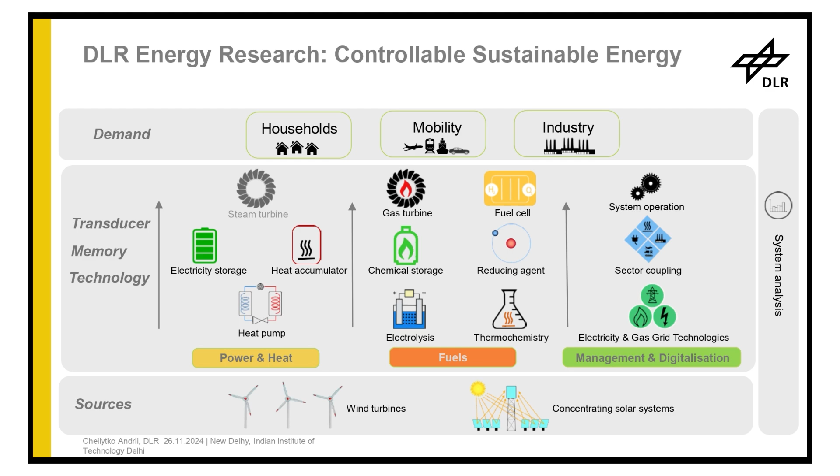We use different sources such as wind turbines, concentrated solar systems, and storage and technology. We can meet demand for heat energy, electric energy, including households, mobility, and industry in general. We provide power and heat. We can create fuels, solar hydrogen, and others now. We also work with management and digitalization.

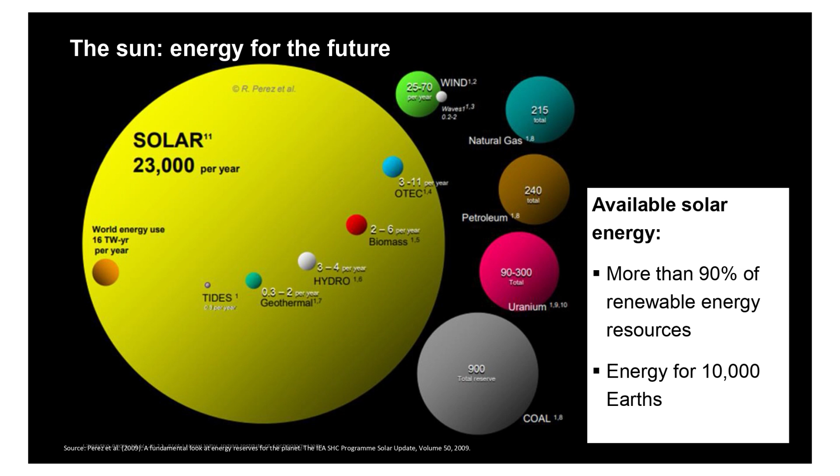Now about the Solar Institute. So, solar is the biggest potential source on our planet. Maybe on Mercury or Mars we can have others, but for our planet, it's not comparable. In the slide you can see its potential, what potential energy we can have. Question: why don't we use it? Or we use it, but not enough?

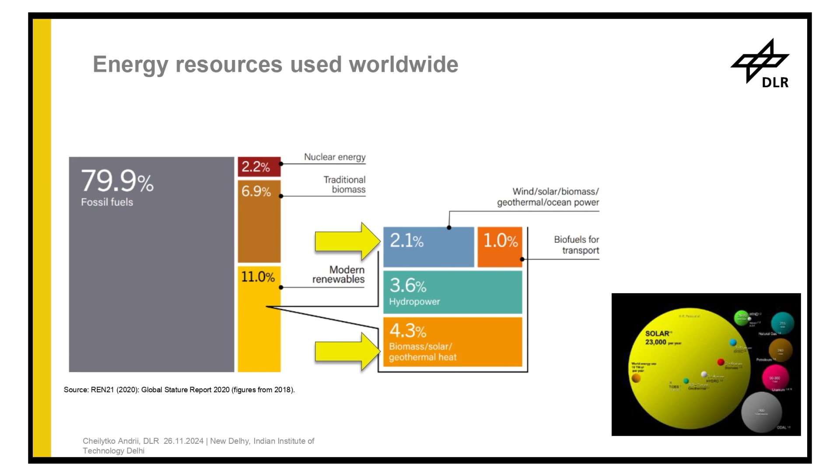If we compare with fossil fuels, including biomass, it's not comparable in general. But what energy sources were used worldwide in 2020? Almost 80% fossil fuels. It's a fact. A little bit of nuclear, 7% biomass, and 11% renewable energy. Question: with this biggest potential, why don't we use it?

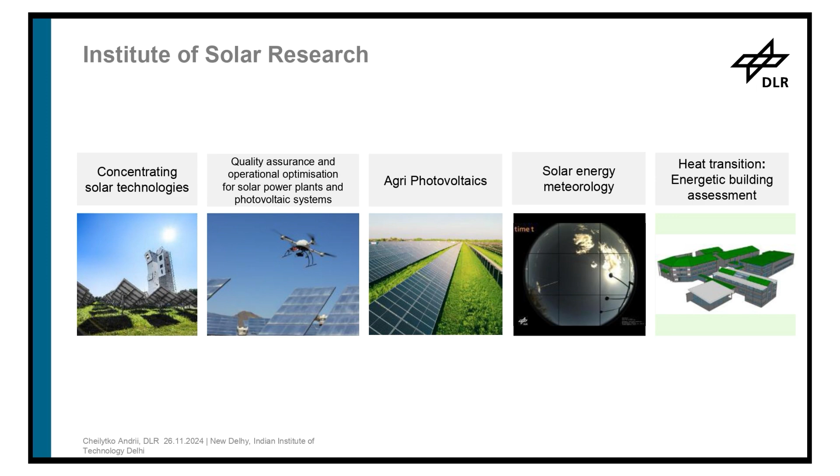What is the problem? High cost, not enough scientific research, or not enough energy efficiency? So, yeah. Our institute is about the future. We think about how we can improve current technology in every industry, in every household, and how we can use our solar energy for any technology.

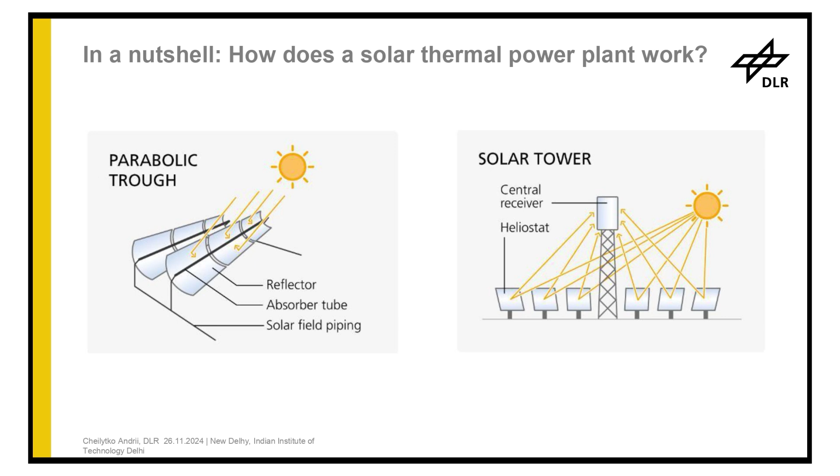Our institute has different departments: concentrating solar technologies, quality assurance and operation optimization for solar power plants, photovoltaic systems, agri-photovoltaics, solar energy meteorology, and heat transition and energetic building assessment. What is concentration? Today we must speak about concentration technology and how we can use solar concentration. It's for the most common technology.

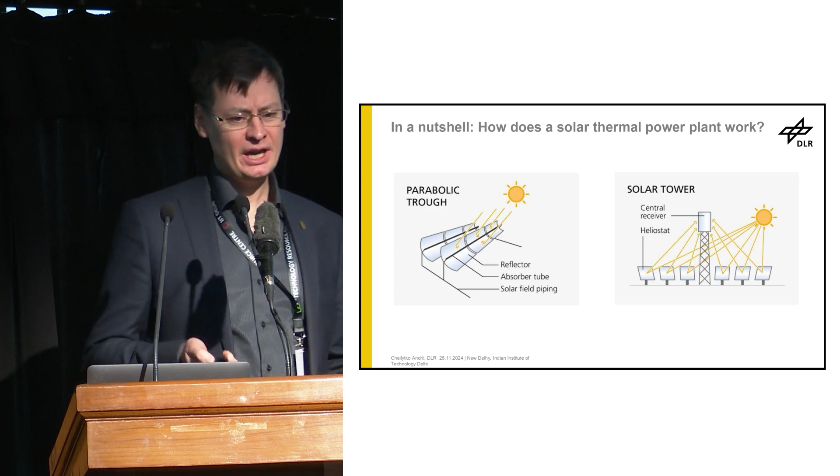We speak about two types: parabolic trough and solar tower. The general principle of work you can see in the slide. We have reflector mirrors that collect solar rays, bundle them, and reflect them to the solar receiver. There are different kinds of solar receivers; we can design many kinds, but the main task of the solar receiver is to transfer radiation to heat energy, and then we can use this heat energy for other systems, with or without catalytic reaction.

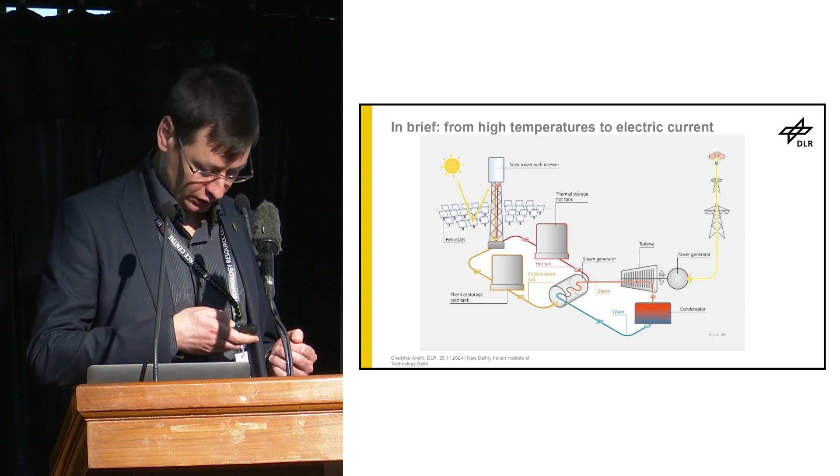A little bit more about how it works for the solar tower. Why solar tower? It's what I'm working on. So we have a lot of heliostats, a field of heliostats that collect and bundle solar rays and reflect them to the top of the solar tower. In the solar tower we have the solar receiver, which transfers radiation energy to heat energy, and usually we use thermal storage, a hot tank and a cold tank. This scheme is for molten salt.

We use molten salt, and through a heat exchanger we can transfer our energy to steam, to water, and this part is the standard part of a thermal power plant. So we use steam for the turbine, 2-3 turbine stages, high pressure turbine, low pressure turbine. For solar towers we usually use a low pressure turbine, and with the turbine and an electric generator we can produce electric energy.

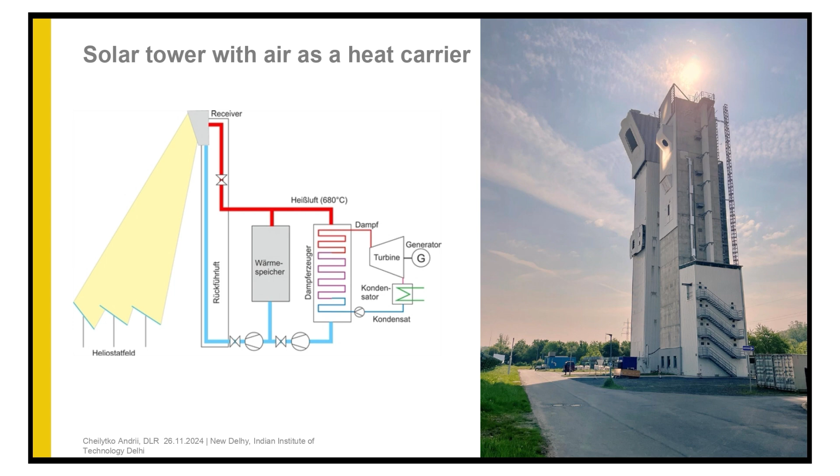Another way, we can use air, not molten salt. Why air? Molten salt we can use only up to a maximum of 545, okay, now it's 575 degrees Celsius. With air we can heat up to 1000 degrees, and we do 900. So we use a technology called the open volumetric receiver: we heat up air, have storage for air, and use the hot air in a heat exchanger to generate steam, or we can use it from this scheme for cement production or other technology.

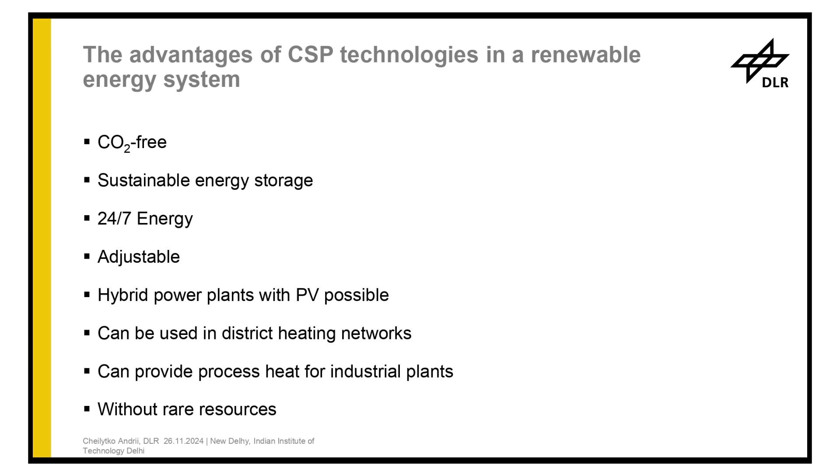It's an open volumetric receiver. We'll speak about the other tower in another slide. So, what advantages does this technology have? CO2 free, of course. Sustainable energy, of course. 24/7, yes. Theoretically, potentially we can get it with big thermal energy storage. Theoretically yes, practically no. It's low efficiency.

Adjustable, yes. Hybrid power plants with PV are possible. So for producing electric energy, or for complicated processes like the cement technology we spoke about, it's also possible to create a hybrid power plant. So we use concentrators, our parabolic troughs or solar tower, with PV panels. And according to the latest research, the cost is near as low as with PV panels alone. So it has very good economic profitability.

But we have electricity and heat, not only electricity. So it's also possible to use it for district heat networks, it can provide process heat for industrial plants, and without rare resources.

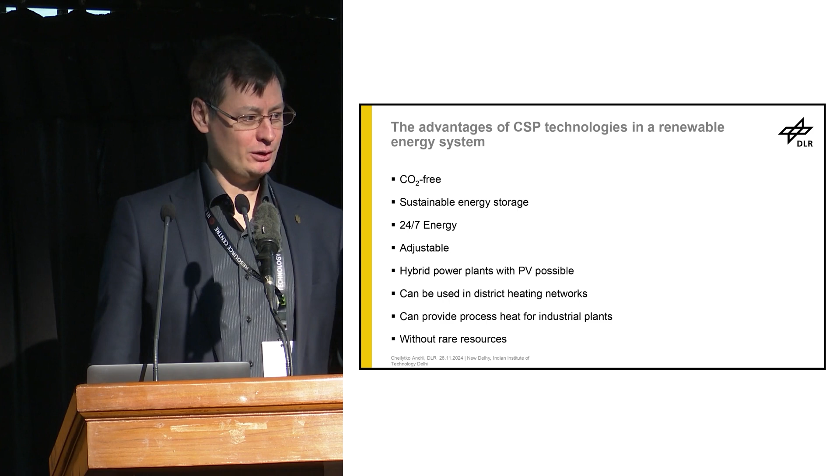And we use it in Germany. Come on, we don't have sun in Germany. It's not a solar country. Okay, Stuttgart may be more sunny. We are in NRW, North Rhine-Westphalia region, near Köln. It's not about solar in general. The weather is more like in the Netherlands.

So, milestones of our institute. We started in 2011 with some parabolic troughs and some facilities in Köln. The Institute of Solar Research was founded, not about aeronautics, but about solar energy and sustainable energy. In this year, we also took over the Jülich Solar Tower. It was a real plant for electricity production, and yeah, we bought it. In 2017, we built Synlight, the biggest artificial sun. It's a powerful laboratory for solar research.

In 2020, as a spin-off from us, the Institute of Future Fuels was established. It's solar hydrogen, solar kerosene, solar gasoline and others. And in 2020, we built a second solar tower for research. It's a multifocus solar tower for research on particle receivers, cement technology, and other technologies.

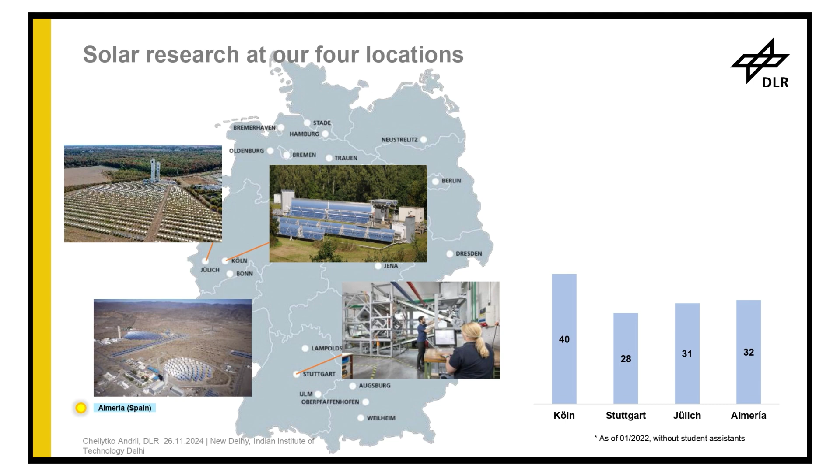Our geolocation. The main solar tower we have in Jülich, North Rhine-Westphalia region. Parabolic troughs and facilities we have in Köln. We have a solar power plant in Spain, Almeria. And in Stuttgart, it's a research center for fluid dynamics and material technology.

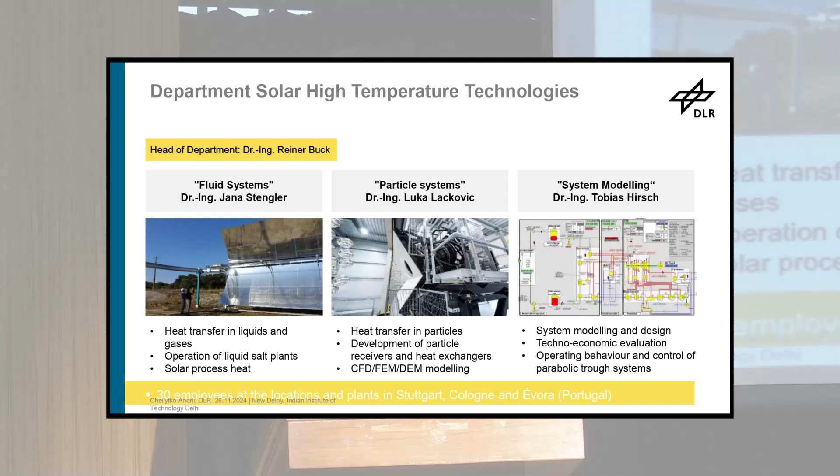Okay, what we do. Department for Development and Optimization of Solar Thermal Power Plants. It includes solar high temperature technologies, solar power plant technologies, qualification, and chairs in Aachen. Department of Solar High Temperature Technology: fluid systems, particle systems, and modeling of systems.

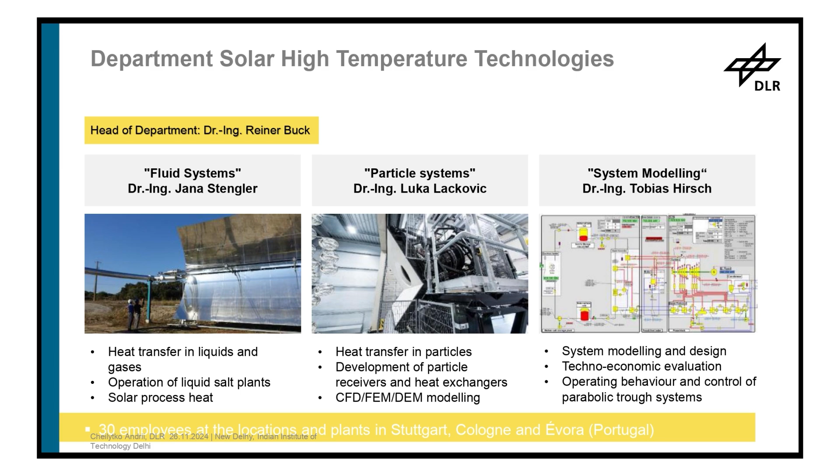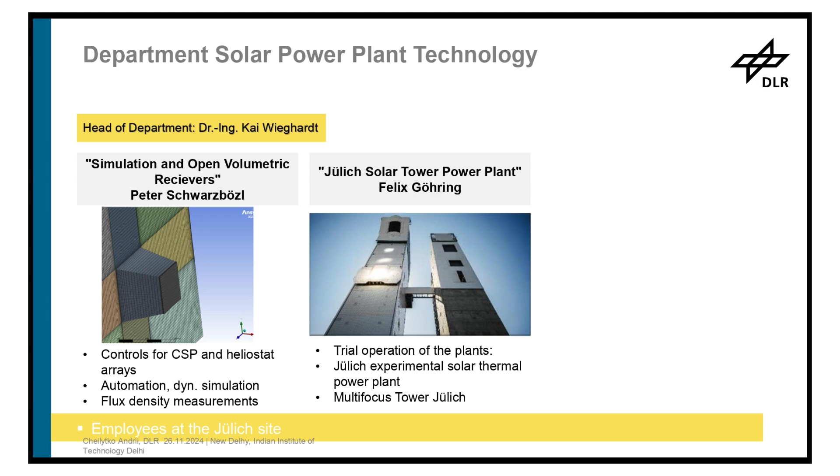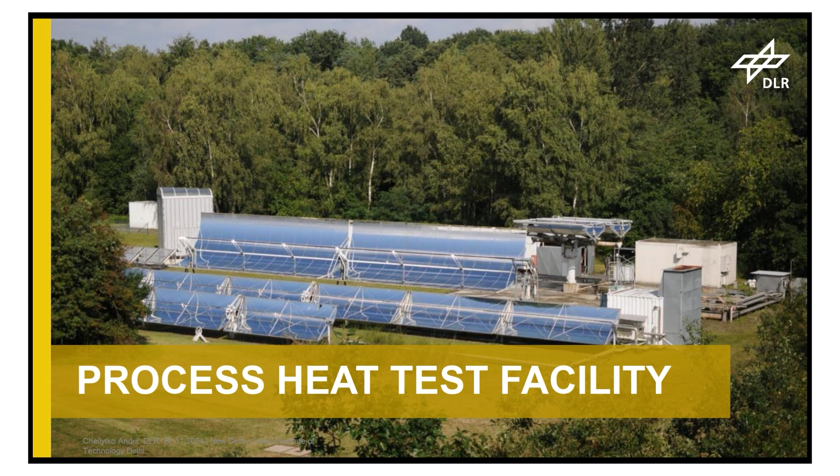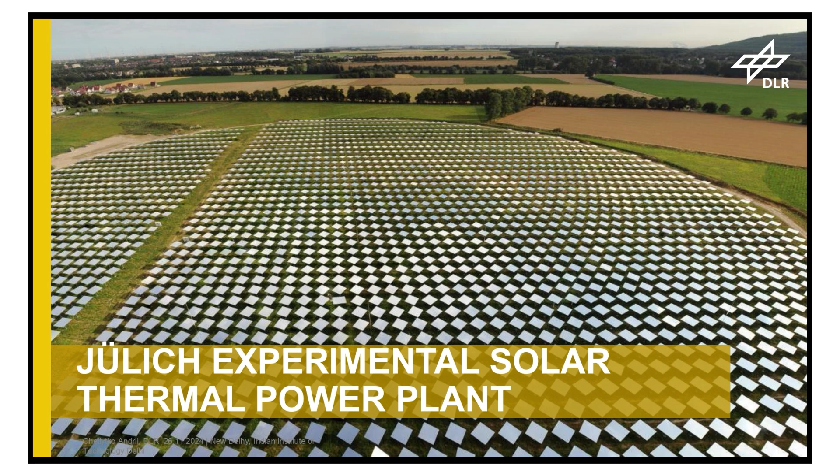Our facilities. Plataforma Solar de Almería, Spain, operator CIEMAT. Process heat test facilities, Köln, Germany. Évora molten salt platform. Jülich experimental solar tower plant, 2000 mirrors.

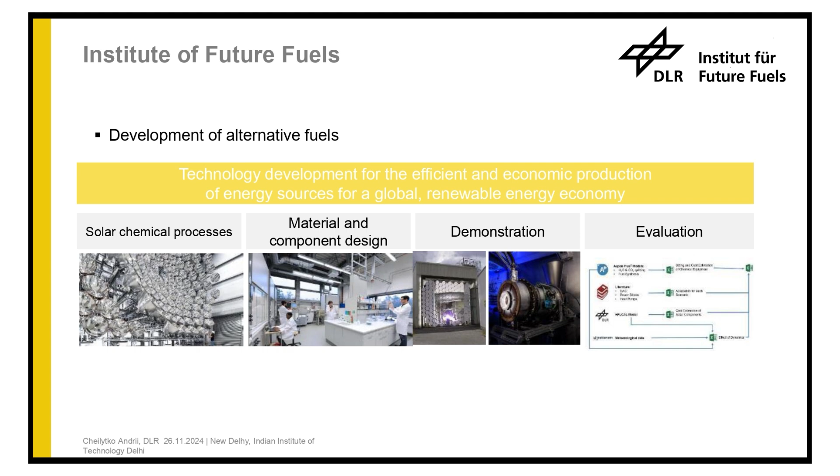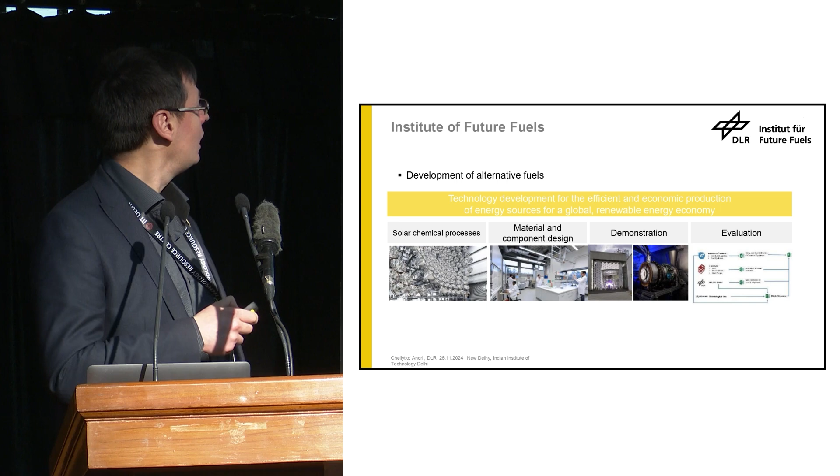And a little bit about the Institute of Future Fuels, because they will speak about it in the third part. The Institute of Future Fuels also researches the calcination process with direct solar radiation. So that's about our institute and our technology.

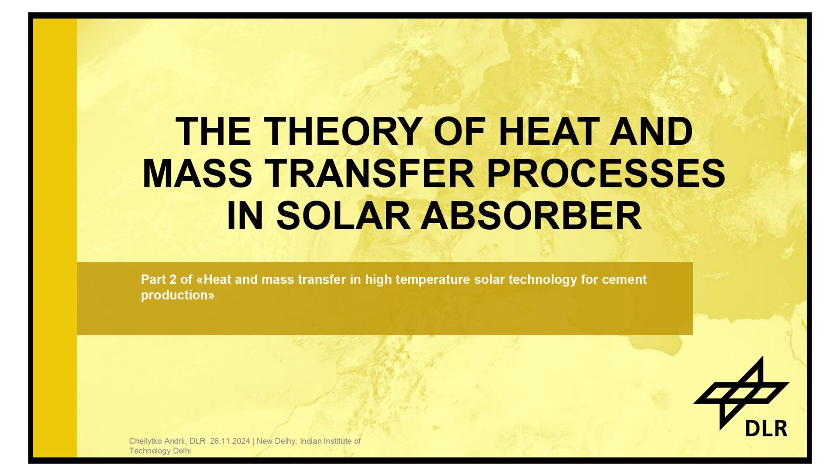I know it's lunch time, but I have a little bit of time, so I'll try to spend it on something more scientific. The second part of my talk is about heat and mass transfer, for student researchers interested in absorber technology, porous technology. My background is heat and mass transfer in porous media in general, and for 3 years I have focused on solar absorbers.

So we have... one moment, please. Good.

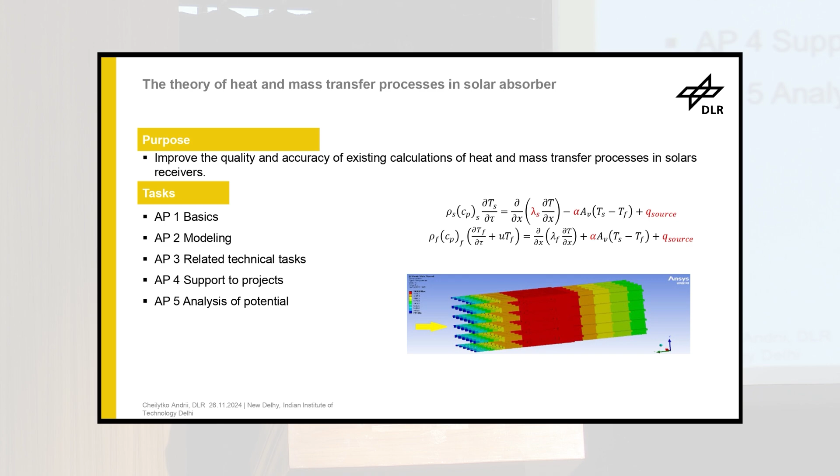So, theory of heat mass transfer process in solar absorbers. First of all, I understand you have good background in chemistry, civil engineering, and others, but I hope you know a little bit about heat mass transfer. At least we know the kinds of heat transfer: we can transfer energy due to radiation, convective and conductive, and of course diffusion, which is mass transfer.

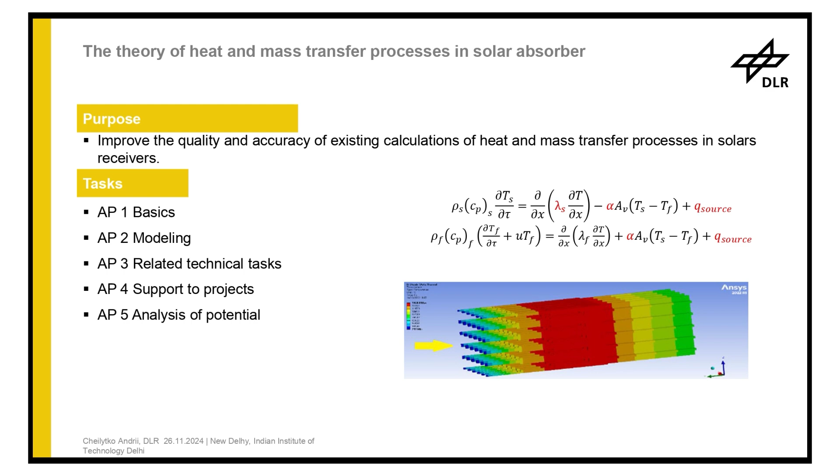What's the question we have? First of all, for porous structures, we have a lot of methodology, but the common method is numerical. What's the problem with numerical? We can calculate almost everything with numerical methods. But can we optimize a structure with numerical? Yes, with one material and 1,000 operations we have 1,000 results. We can optimize some porous structure if we want a specific structural result.

Question: can we do it the analytical way? With an analytical mathematical approach, it's very easy to do, but right now, no, we haven't - we don't have a good enough quality analytical approach. And it's my task to create this approach or improve the currently existing approach for heat mass transfer.

What's the problem? We have some methods. The most common, easiest method uses an effective coefficient. In the standard equation, we use S for solid and F for fluid index. So we use a standard Fourier equation to calculate heat transfer process with sources or without sources.

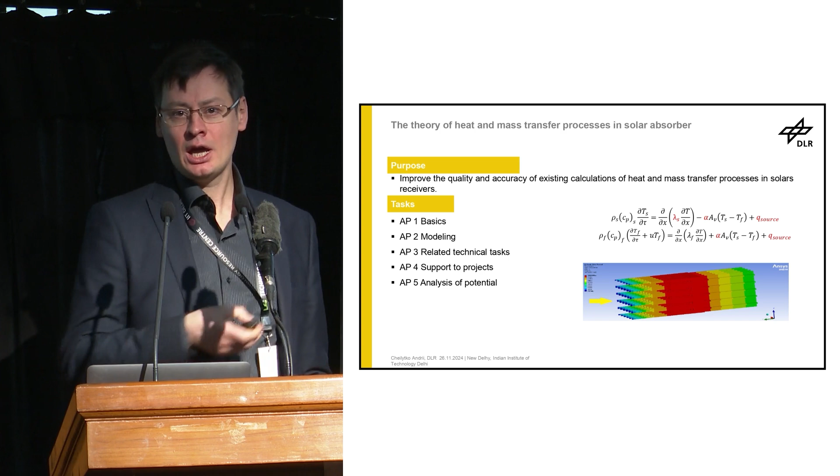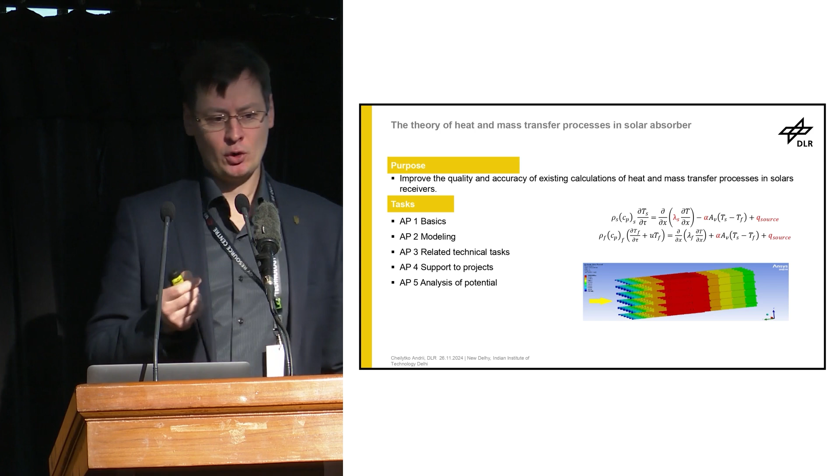Second question: can we use alpha via Nusselt? Of course we can use the Nusselt criterion for calculating alpha. What's the equation for calculating Nusselt? There's a typical equation, I will speak about it and show it. But the typical equation is also not good enough - we only have 30% accuracy in calculating alpha. That's the best I can find for structures we know. For unknown structures, we have more than 100% error - it's not a research-grade accuracy.

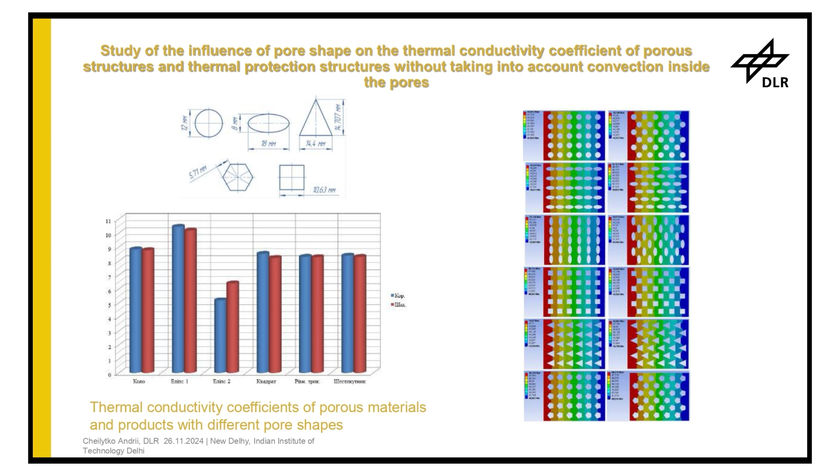So we were thinking about how different pore shapes influence thermal conductivity. First, without convectivity, just the conductivity coefficient - we can see that the shape of the pore has an influence. We did a very simple experiment for students with borosilicate glass; knowing the porosity, we can measure thermal conductivity easily and compare with different fluids.

We can compare with the most popular models - Eucken, Schutz, Torkar - and Odelevsky from Heat Atlas. I'm not sure, do you use Heat Atlas in India? It's like the most popular engineering book for calculating everything in heat mass transfer in Germany.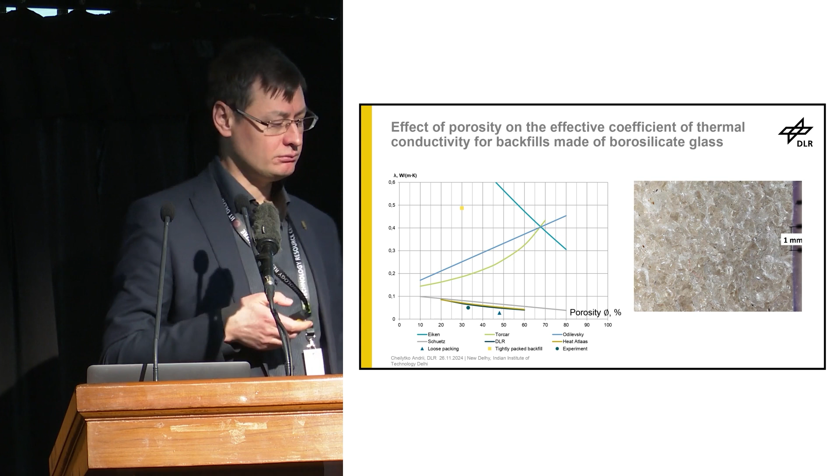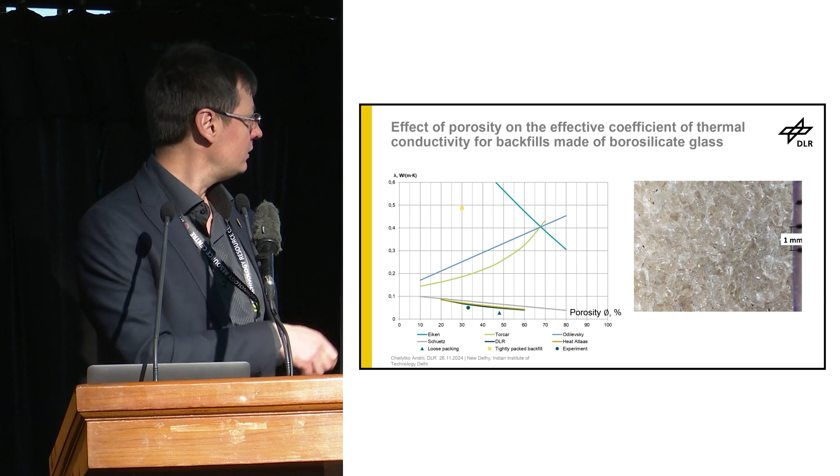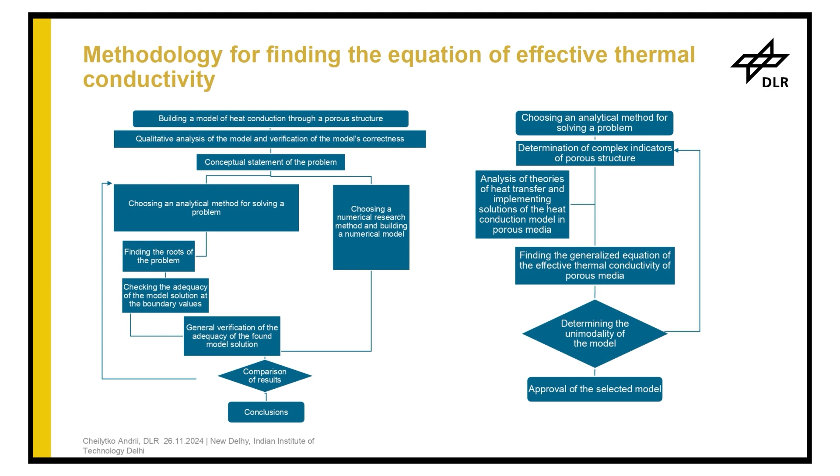For standard tightly packed, backfill, loose packed structures, we have our experimental points, and you can see other equations here. We have two approaches - one is our DLR approach, shown on the next slide, and it's very close to Heat Atlas. We can calculate it with only one efficiency coefficient, and it's for chaotic structures which I think will be used in your receiver.

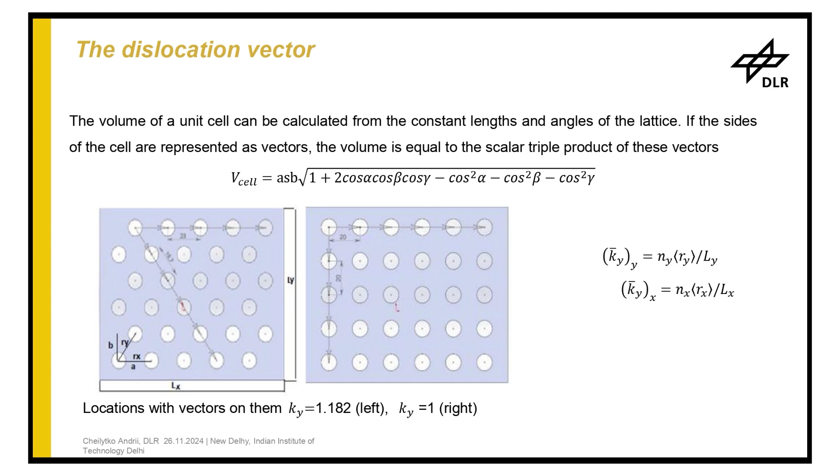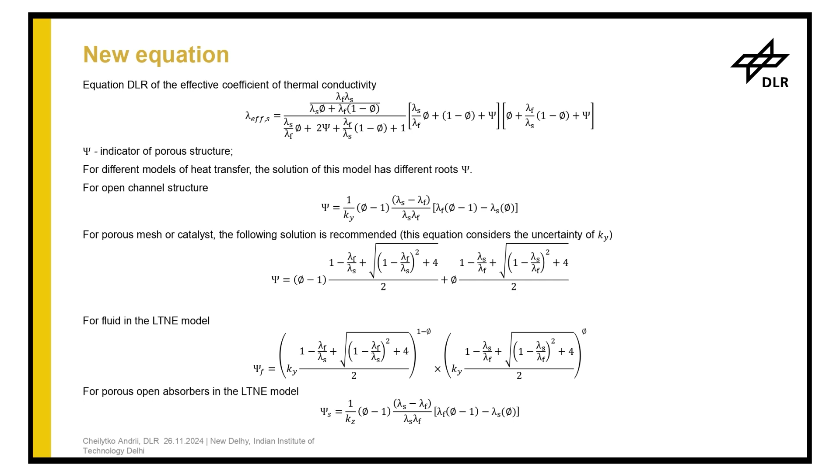So I won't spend your lunchtime on methodology and a very deep approach. We included some coefficients, like a dislocation vector, that include geometry characteristics of our structure. After including this coefficient, we can get an analytical solution for different structures, whether chaotic structures or foam, for the LTNE model.

This model, included for catalysts also, has less than 10% accuracy. It's better - for our task, good enough. For other applications I'm not sure. But for solar research, because the biggest energy transfer is due to convective transfer as a fluid, 10% accuracy for conductive transfer is good enough for us.

In this slide, you can see a comparison of different models for calculating the effective thermal conductivity coefficient. This is part of an absorber type HiTRec, part of an absorber type StepRec - 3D model, 3D printed. This is the absorber, made by 3D printing, this is silicon carbide. So theoretically, we have two standard curves, and between these curves is our real solution.

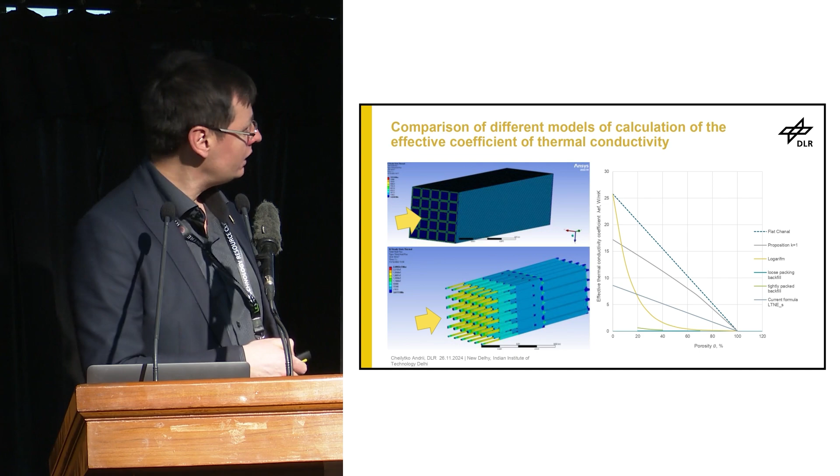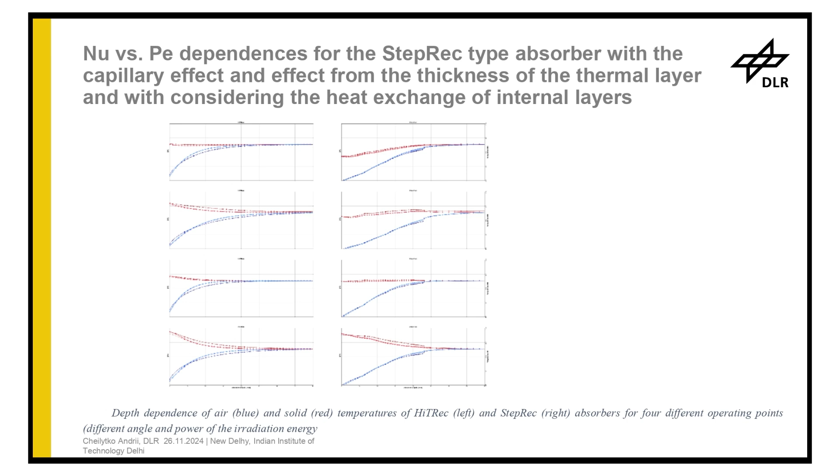So you can see that with our proposed model, it's theoretically good. And practically, we included this module as a homogeneous approach for open foam and calculated our heat transfer. I can see very good accuracy.

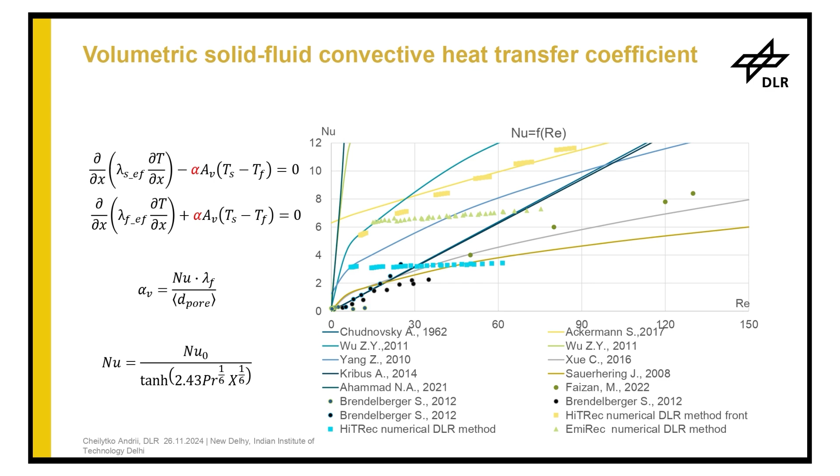But it's about, so we solved only one problem like 2 years ago. Second problem is about convective transfer, heat transfer. And you can see in this slide, standard graphic, Nusselt from Reynolds.

And you can see different theoretical functions. This is numerical solution, and around it, experiment. What's the problem with this? Coefficient, Nusselt coefficient, we can calculate, and due to Nusselt coefficient, we can calculate alpha.

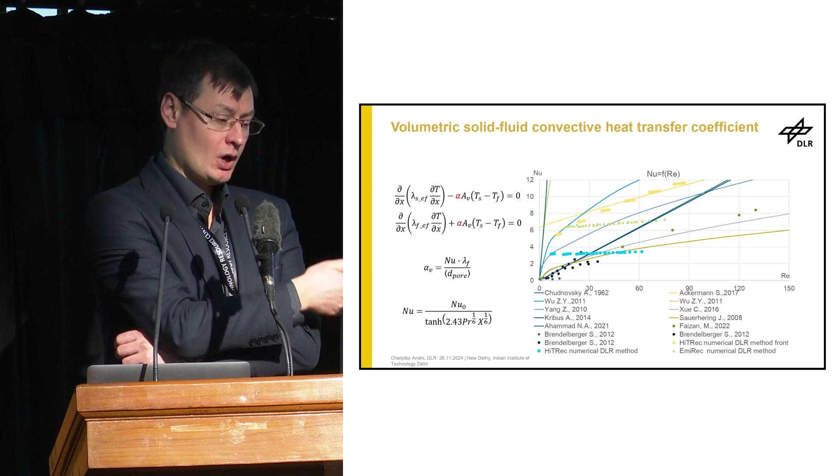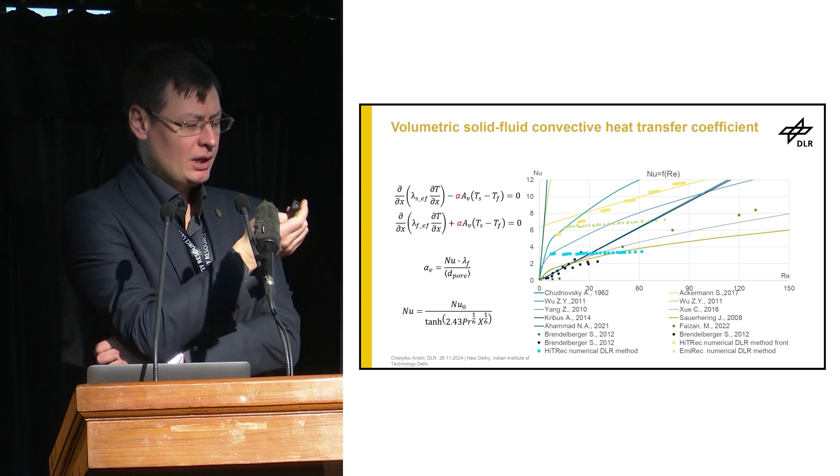Yeah, of course. But Nusselt coefficient, we can calculate only for some simple structure of absorber. Or for chaotic structure, we can use Darcy equation. But it's also not a better result.

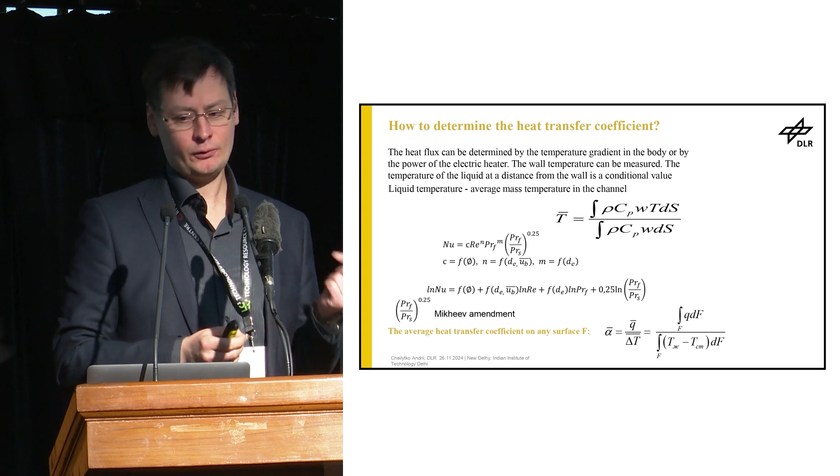So what's the problem with doing some experiment, measuring it, saying okay, it's working, we know this? The problem is that if you change a little bit other parameters of structure, or fluid, or angle of solar radiation, your model will not be working. So you can't just do an experiment and say, okay, I'll use this coefficient for other models. It's not working, unfortunately.

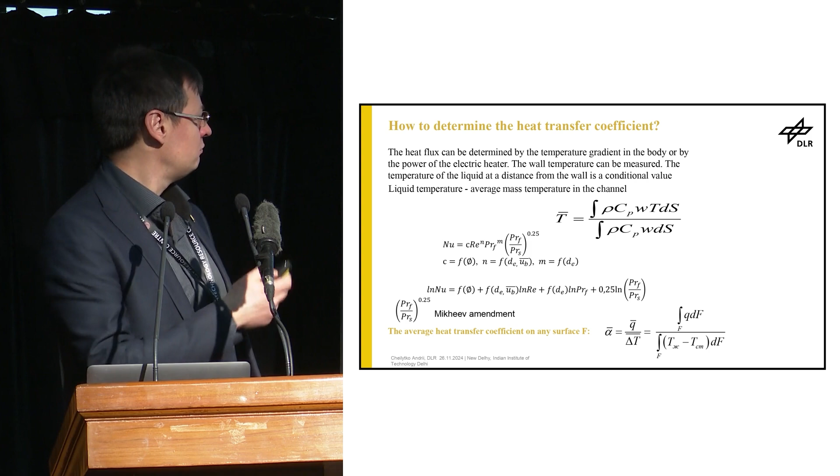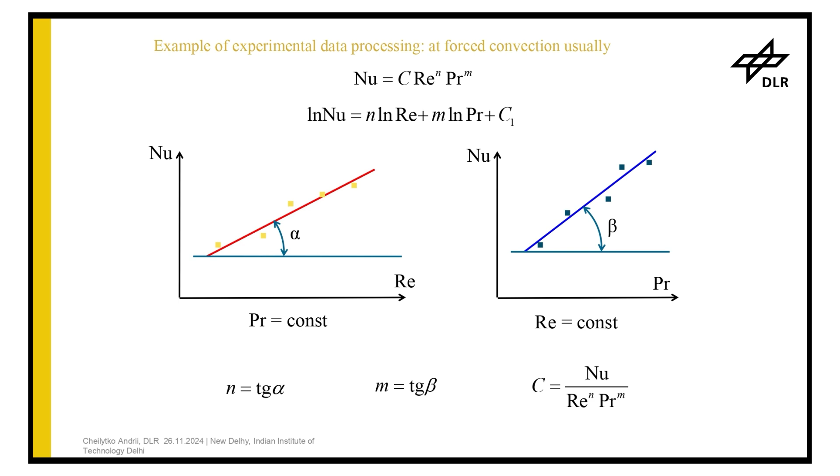The standard way is included in the standard book of heat mass transfer theory. We can calculate the coefficients C, N, and M if we know Reynolds and Prandtl coefficient. We build some graph, we have experiment points and build this line, and after this we know the angle and can calculate other coefficients. It's the standard way to understand the experimental Nusselt criteria.

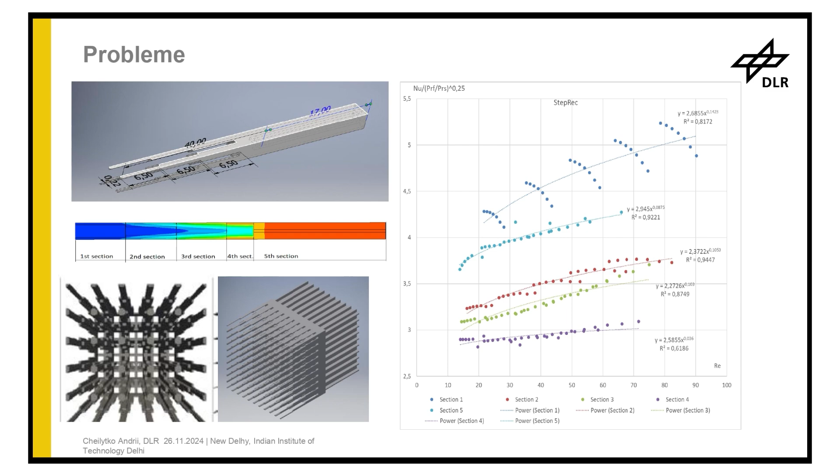But if we have this one channel for a new absorber for solar radiation with 3D printing technology, this is one channel, like this schematic. We have 5 sections. Each section has different geometry parameters, and each section has its own solution for the standard Nusselt approach.

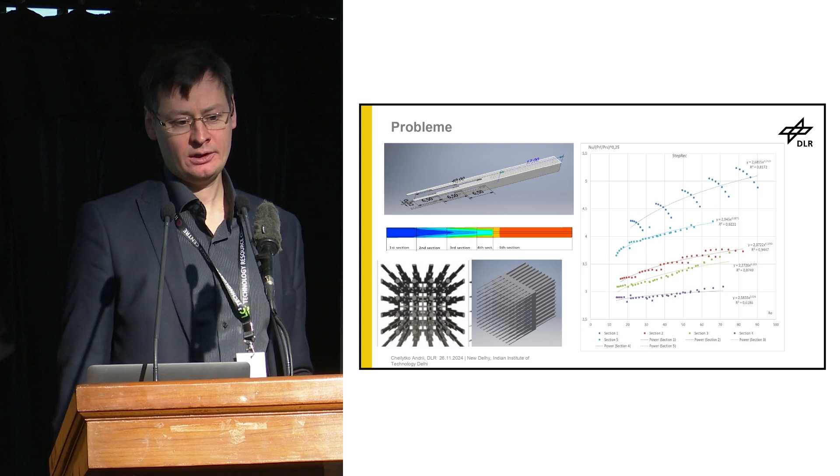If we use the standard approach, and for the first section in general, we can see that it's in general impossible to create one curve to understand our coefficient. This is our fluid dynamics model, and it looks like this absorber in the full model.

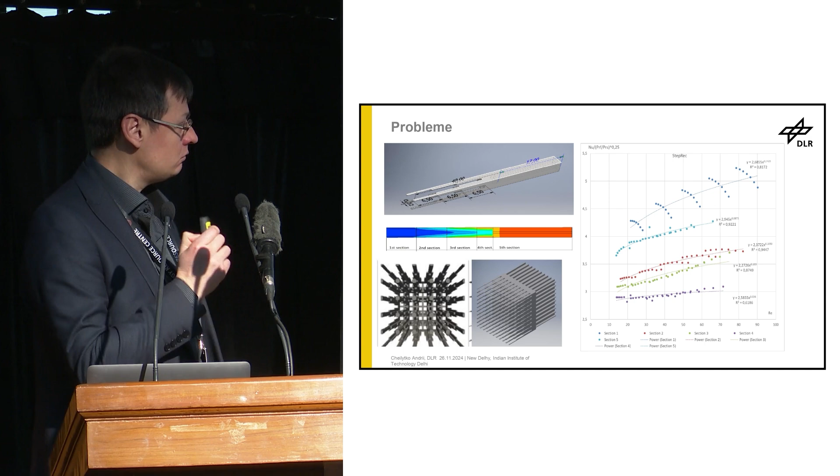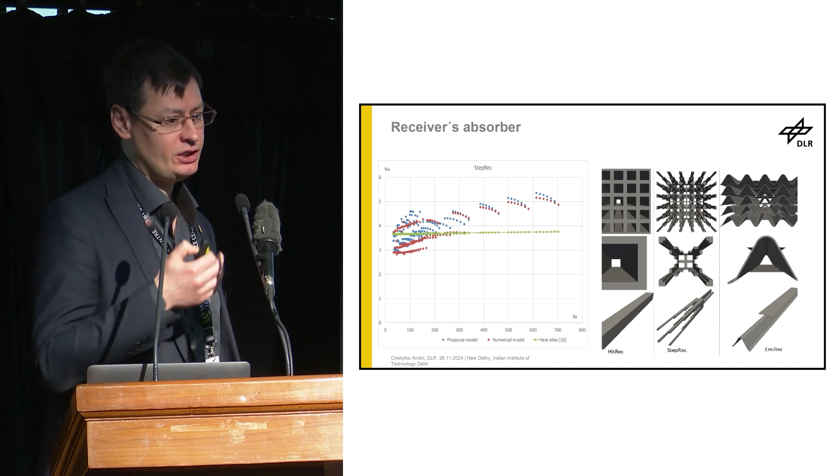So we thought about different ways to make this possible, and like half a year ago we published an article, and we can create a universal model for different approaches. It's the standard, most common, most popular solar absorbers for open volumetric receivers for heating air: HiTRec, StepRec, and EmiRec. It's one channel of this absorber.

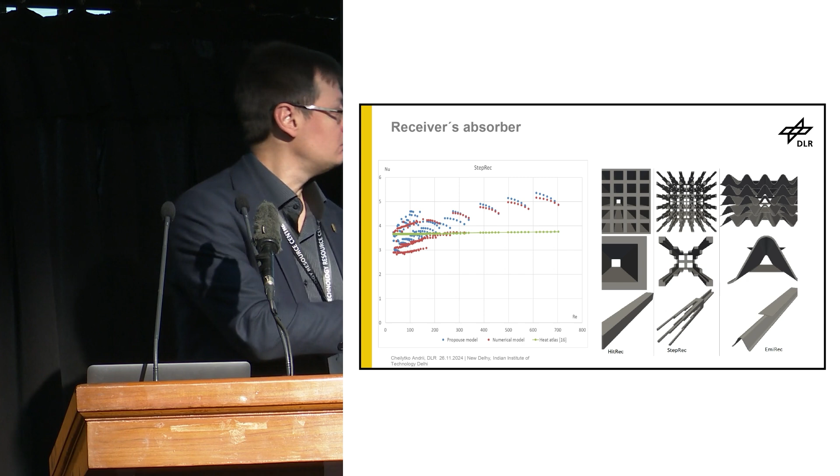You can see it on the slide, and for each absorber we have a standard model. That standard model is very average. Yes, good, but with the standard model, it doesn't change with our Reynolds. But we know if we change the velocity of fluid, our heat mass transfer will of course increase. So we calculate with our proposed equation and can compare with the numerical solution.

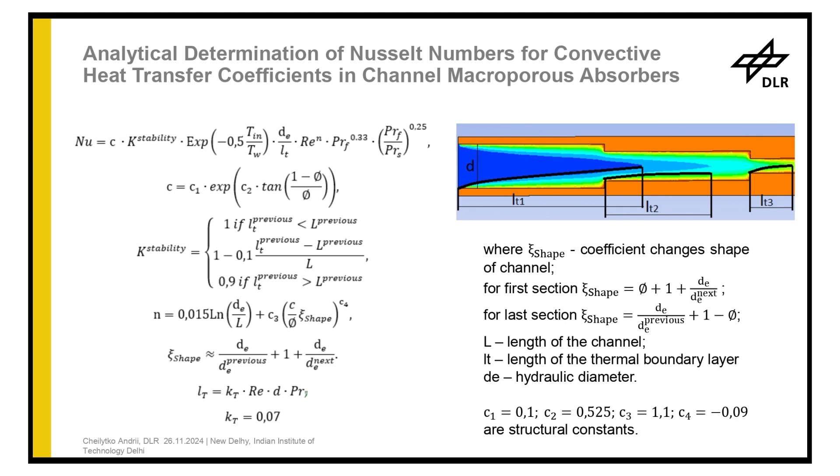It's closely better than previous, but the equation looks very big, very complex. It's not simple, but in general it's one line in a program. So we can use Python for programming, for calculation, analytical, for thermal balance, energy balance, and it's one line.

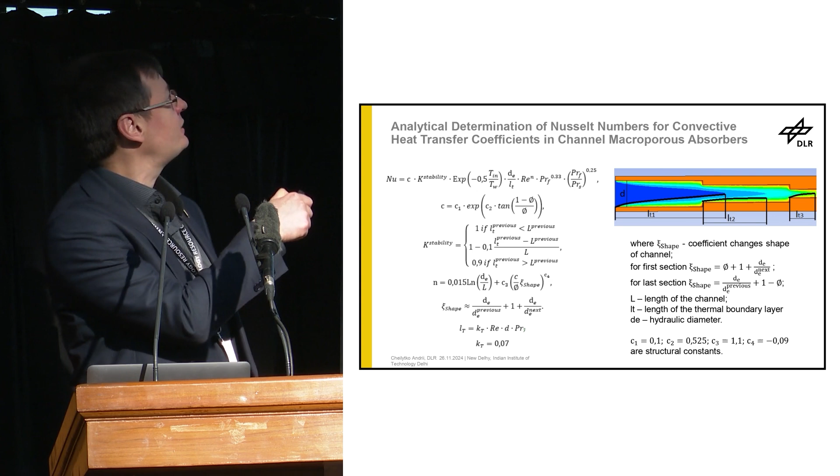Most importantly, we created this equation, and with this equation a lot of different parameters are included. But if we know what geometry parameters we have, we can calculate the Nusselt criteria. And we can do task optimization, the most important use of this equation, so we can find the optimal structure. If we want to maximize Nusselt, we can find, as an example, the equivalent diameter of the channel.

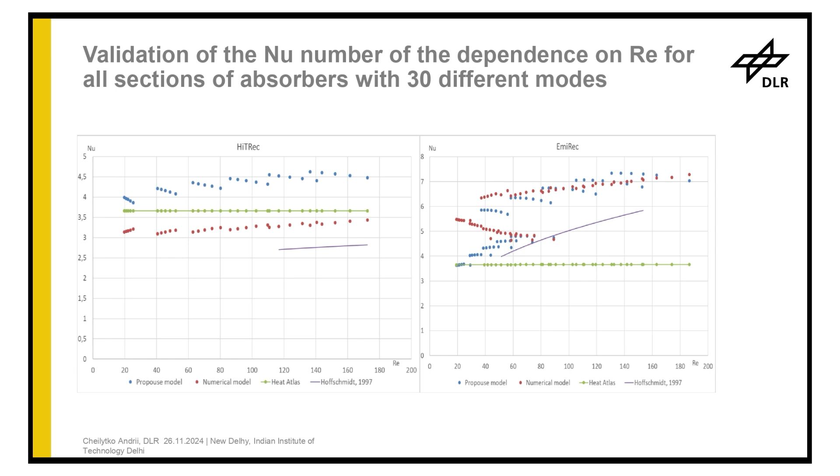It's a result for validation, and it's good enough. In conclusion, now we have this proposed equation as a universal model with 20-25% accuracy. It's not always enough, but it's better than what we had previously.

Right now we have, as a scientist, a task and adjustment to make. The scientist's task is improving and finalizing the radiation model with this analytical approach, because right now we have two different radiation models, and we have a lot of engineering tasks.

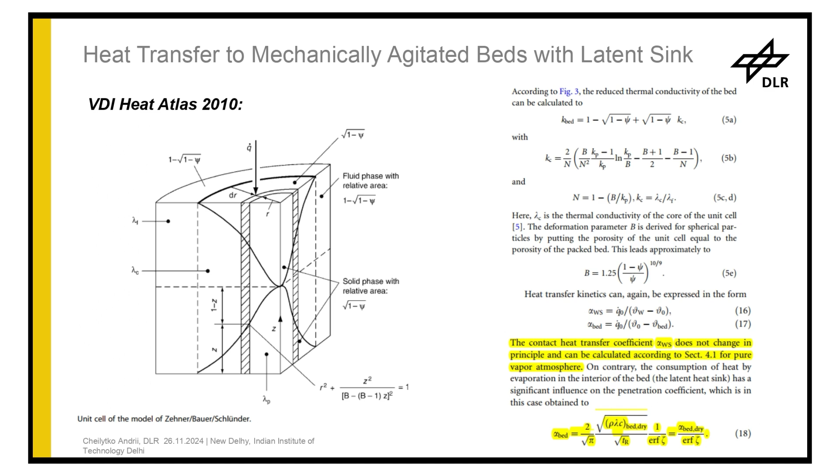For practical purposes, I included this slide about particles, because I didn't include the particle receiver and how we calculate the particle receiver's particle heat mass transfer. Correct, it's heat mass transfer in a particle receiver. We can calculate it using heat transfer. It's a standard equation. We can calculate it, and it works with very good accuracy compared to experiment.

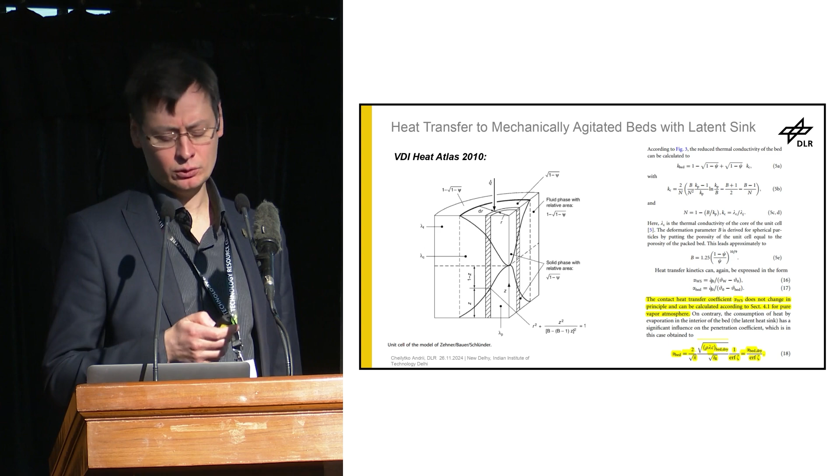So I have a little bit of time. Now about how it works in practical terms, because in theory it's interesting. First of all, it was already talked about cement production, and you know better than me the current situation in the world with cement.

I can also add that solar energy is not only possible to use, it's necessary to use. We can use it. In this slide you can see two configurations of rotary kiln for clinker.

So it's direct irradiation. We have solar rays going inside. This is the rotating part, and solar rays go inside here. In principle we can separate two technologies, open and closed. With purge gas flow, it can be injected at the windows and suction applied at the back in the closed configuration, or in the open configuration without glass, where suction can be applied before and behind the aperture.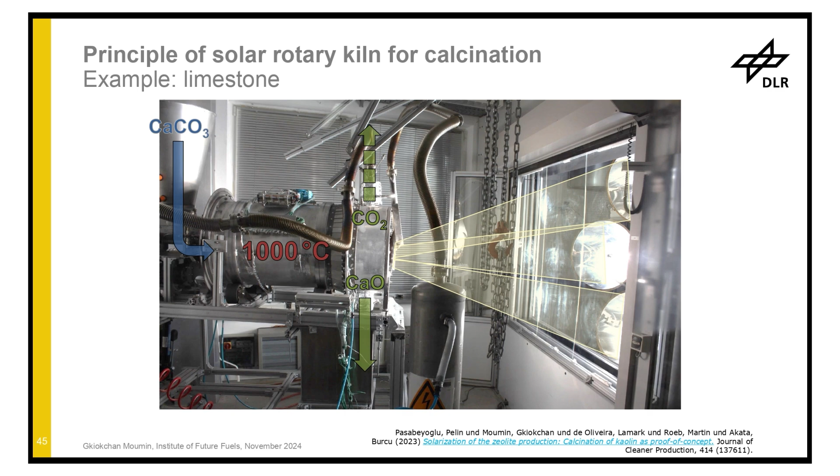In our laboratory it looks like this. We had some experiments with limestone for the calcination process.

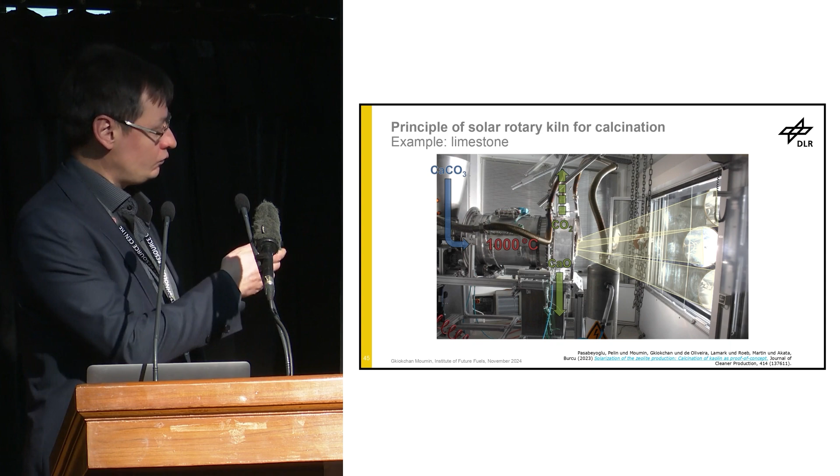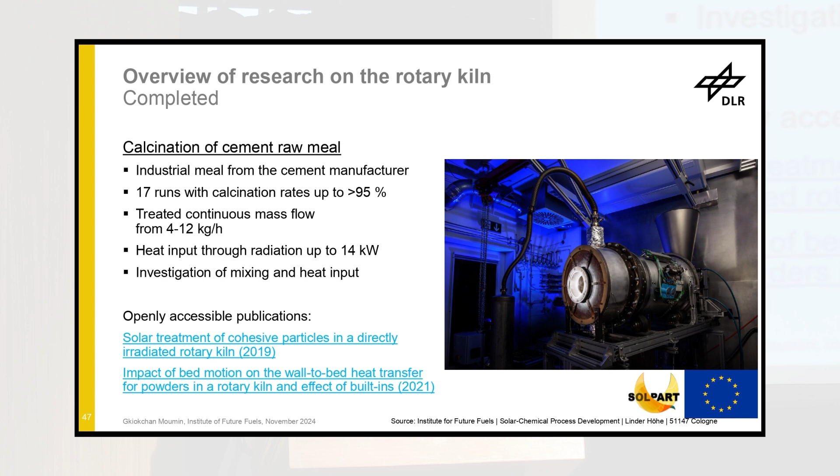Before I spoke about how we can heat up some fluid. Now it's about how we can use the solar energy directly. This is different, and for your project I think you need to understand which way you will use.

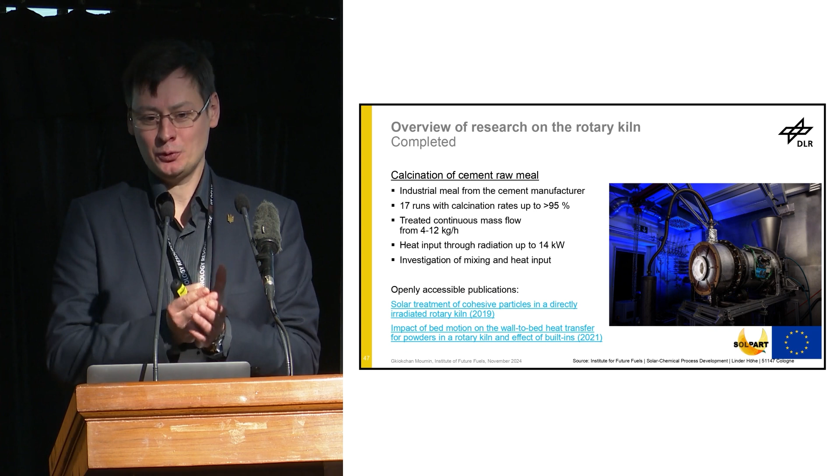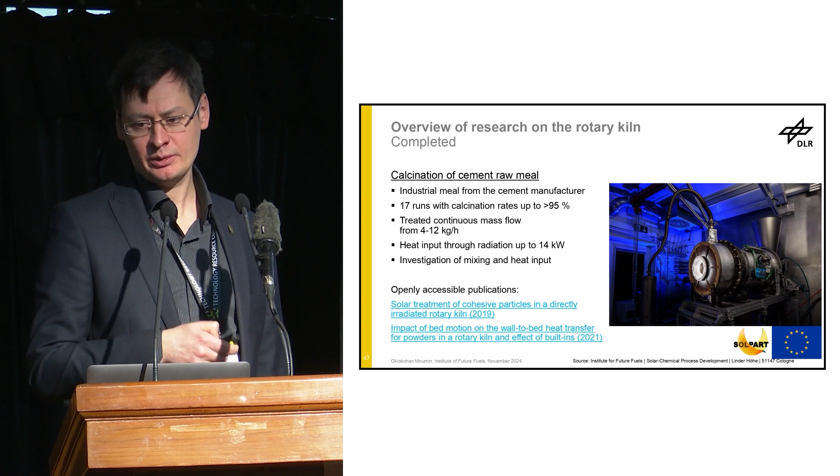So, calcination of cement raw meal: 17 runs with calcination rates up to 95%. There is continuous mass flow from 4 up to 12 to 20 kilograms per hour. Heat input through radiation up to 14 kilowatt. Investigation of mixing and heat input. You can look at these links - I'll leave the presentation, and you can check these links, articles and results of experiments. I won't speak about it in more detail.

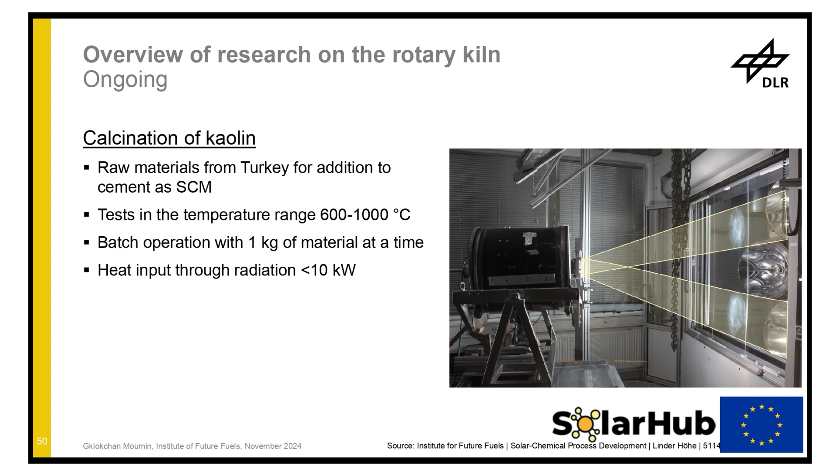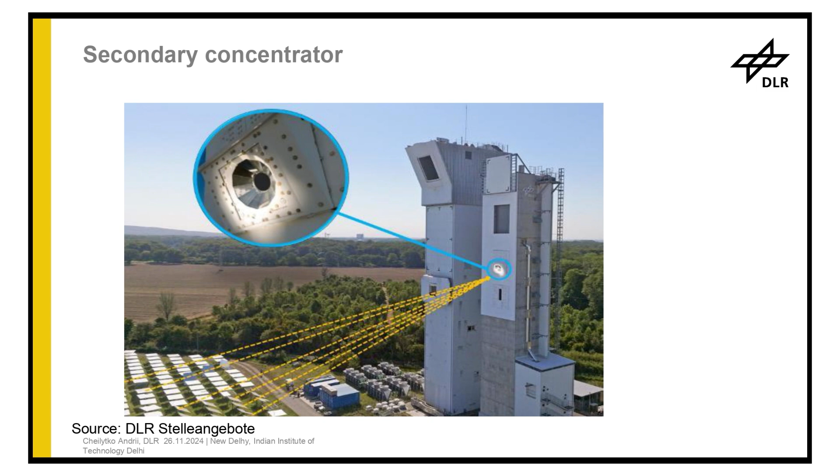Now a little bit for the end, I want to add how we can improve temperature further. If you need more than 1000 degrees, as we discussed, we can use air with temperature 800 degrees. Already we have this technology, can use it for mass production. We can use directly for 1000 degrees Celsius. We have it, we get it. How if we need more? This is a question.

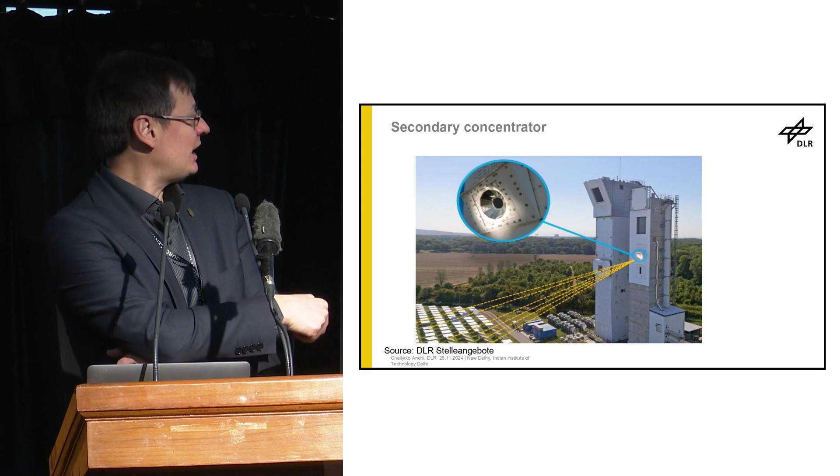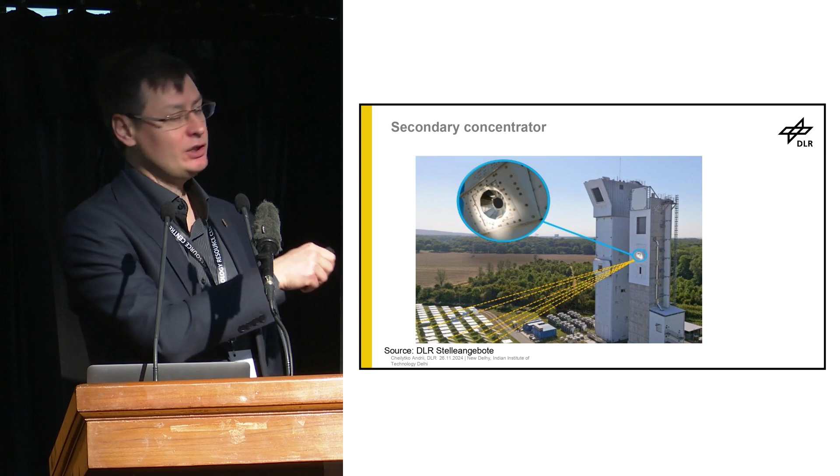We can use a secondary concentrator. Secondary concentrator is concentrated nearby our hole to reactor. It looks like this, and with secondary concentrator we can additionally focus. So with this we can use more mirrors from long distance. More mirrors means more concentrated focus, and we can use it for more radiation. And we can get up to 1250 degrees Celsius.

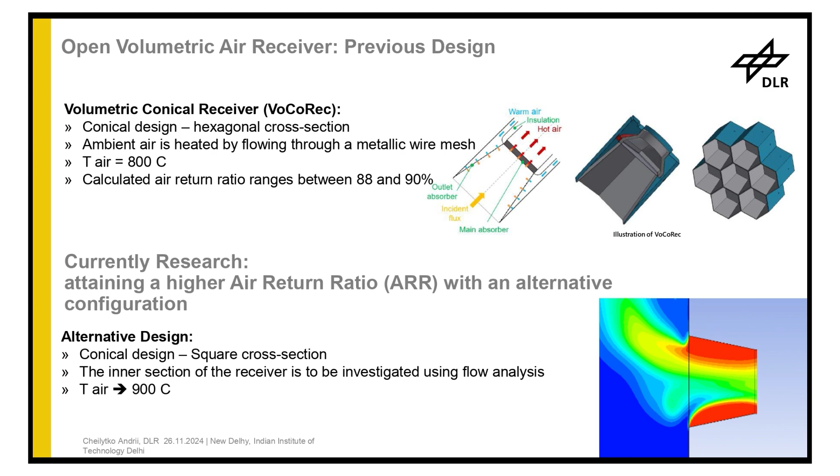And a little bit returning to heating up air - we have discussed about the need for heating up air. We need some windows, or we don't need them. Right now we don't use windows or glass on the reactor. We don't use glass with our receiver. So it's a very similar shape.

We have two absorber materials - usually ceramic absorbers, and the second absorber is from metal. We use it in Inconel 600 as a standard material. The problem is that we have convection losses due to boundary conditions, due to our buoyancy flow. Of course we have gravity - we always have gravity. But we have thermal efficiency like up to 90%.

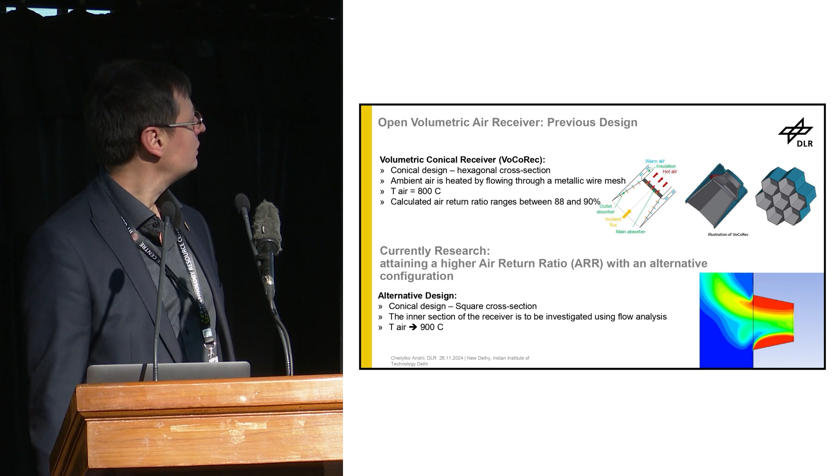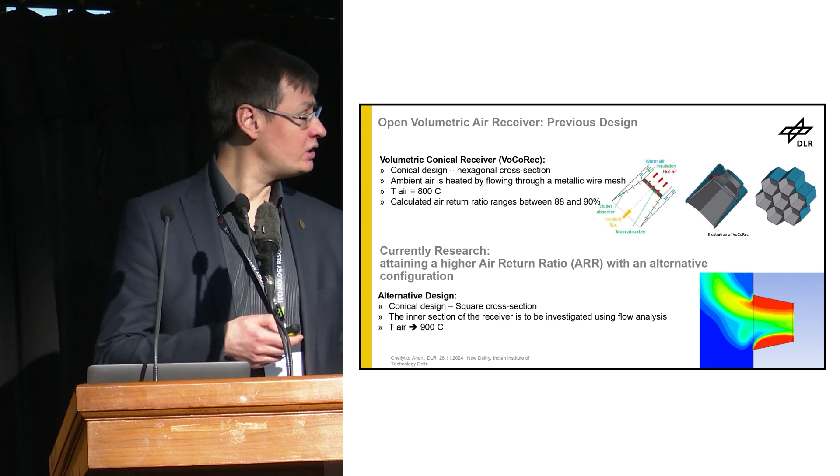Air return, okay, air return. So we lose only like 10%, and we decided that it's better than losing concentrated radiation in the glass. Because if we speak about a small experiment at 1 megawatt, it's one point. But if we speak about 10 megawatt, absorption of glass becomes bigger than the losses we'd have due to convective losses. That's also a last point, and that's what I wanted to talk about. So, thank you.